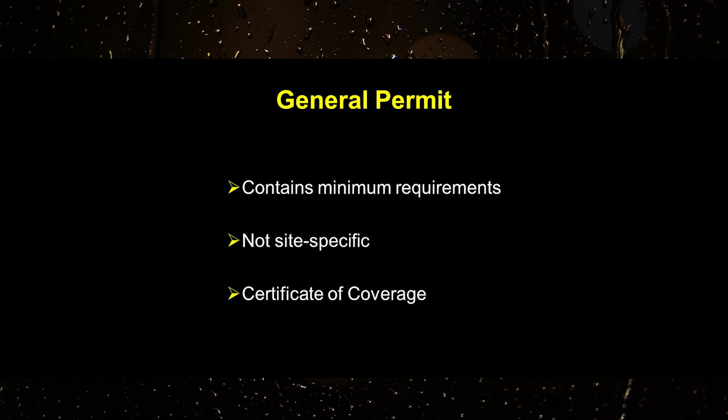A general permit contains the minimum requirements for protecting water quality and is not site-specific. A facility with this type of permit coverage would be authorized to discharge when they receive a certificate of coverage under the general permit. General permits for industrial stormwater are separated into 2 types depending on certain site conditions.

Stormwater discharges not associated with special use areas, or stormwater discharges associated with special use areas. Most facilities will have coverage under the general stormwater permit not associated with special use areas. However, facilities with the following conditions mandate a general permit with stormwater discharges associated with special use areas.

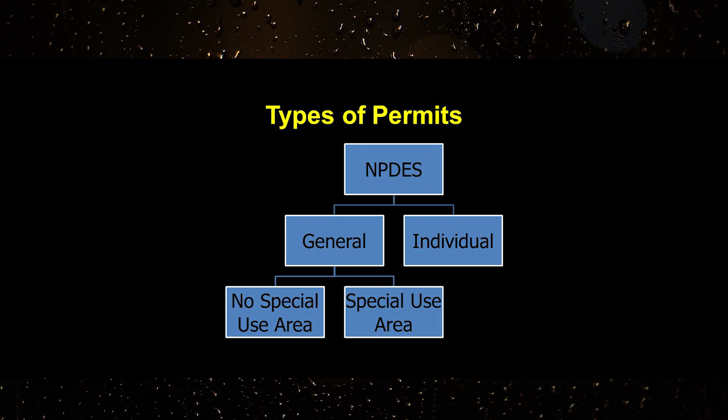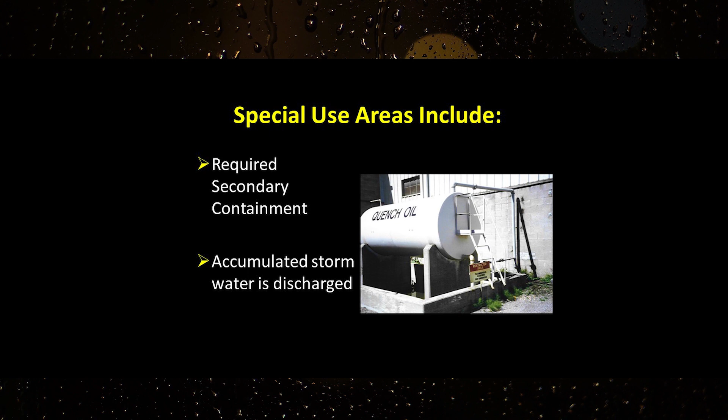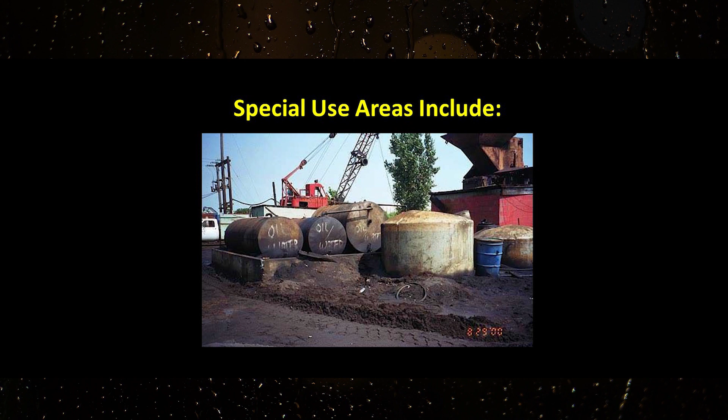Facilities with secondary containment structures mandated by state or federal regulations from which stormwater is periodically discharged to waters of the state. The facility is regulated under Part 201 of Act 451 as a site of environmental contamination or cleanup where known or potential impacts on surface waters are present.

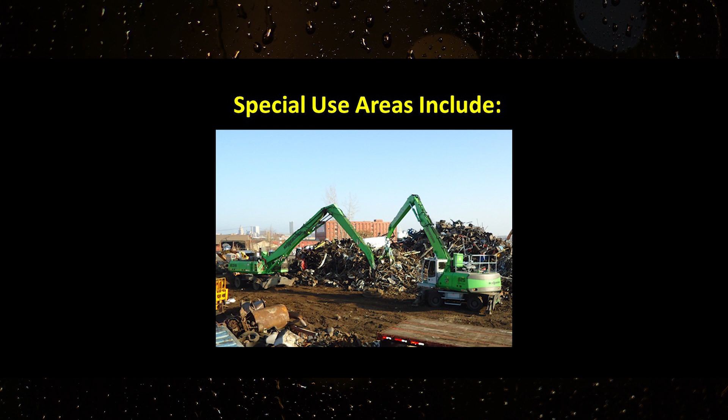The facility has other activities or areas that may contribute pollutants to the stormwater for which EGLE determines monitoring is necessary, or the industrial sector has been designated a significant contributor to pollution by EGLE.

Dependent on the special use area, the facilities will be required to submit either a short-term stormwater characterization study plan or benchmark monitoring compliance plan to assess the stormwater discharges.

Both plans must be submitted to EGLE Water Resources Division District Supervisor for approval 6 months after the COC is issued. All facilities that have authorization to discharge stormwater as of January 1 will be responsible for the annual fee of $260. Stormwater invoices are posted in MyWaters by February 1 and payment is due by March 15th.

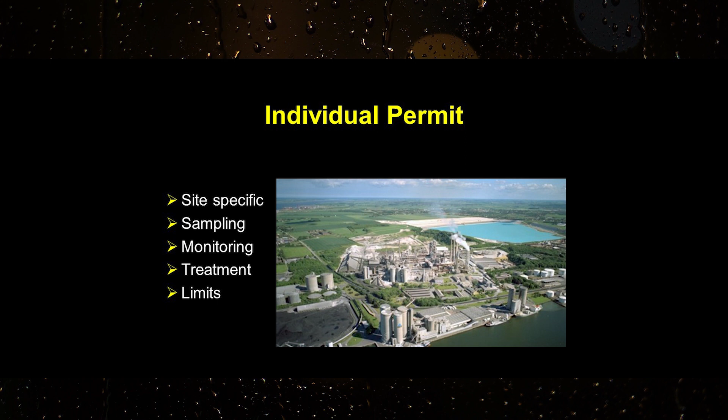If the conditions at an industrial facility cannot be properly managed by the requirements of a general permit, an individual permit written specifically for the facility may be issued. Individual permits are site-specific and contain additional requirements such as regular sampling, monitoring, end-of-pipe treatment, or effluent limits.

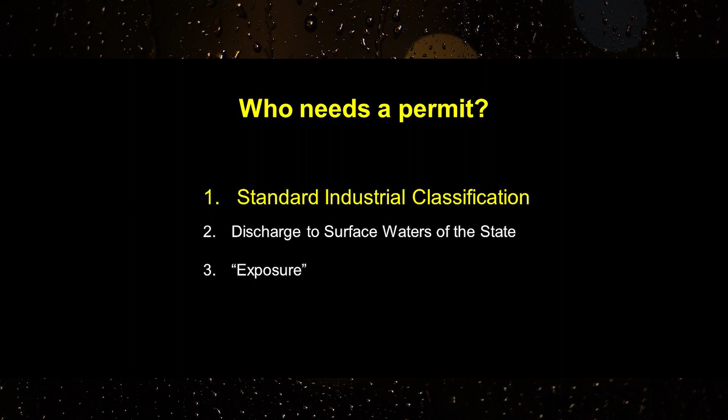There are 3 criteria to consider when determining if coverage is needed under the NPDES Industrial Stormwater Permit. First, determine if the industry is identified in the federal stormwater regulations. Most regulated industries are identified by Standard Industrial Classification, known as an SIC code, while others are included by narrative description.

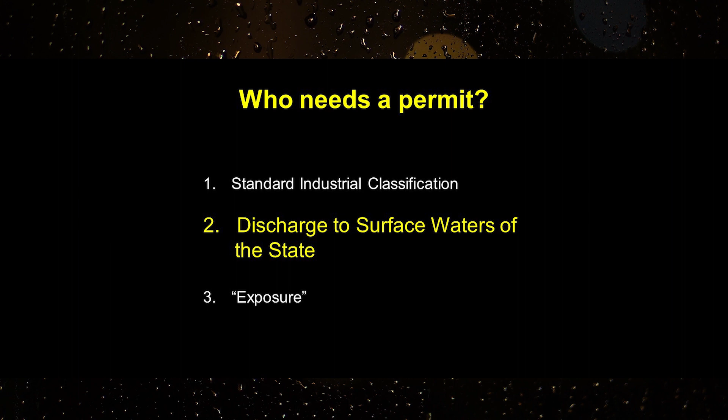Once it is confirmed that the facility is a regulated industry, the next step is determining if there is a point source discharge of stormwater to surface waters of the state. Surface waters of the state include rivers, lakes, streams, county drains, and wetlands. The surface water that receives the point source discharge is called the receiving water.

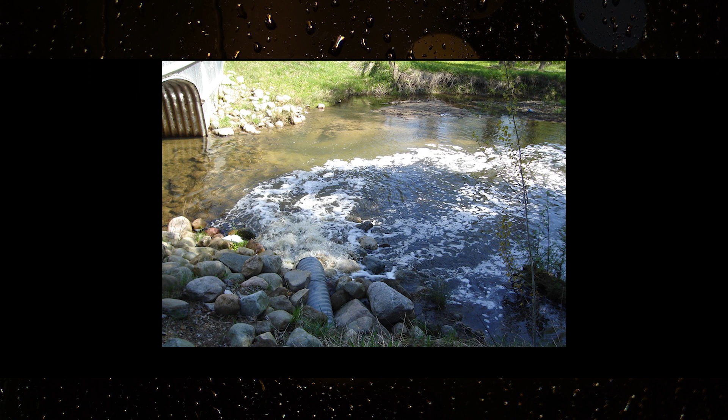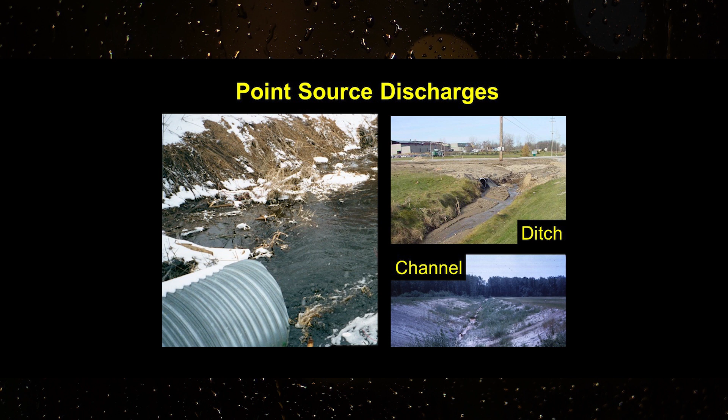A point source is any discernible, confined, and discrete conveyance that discharges stormwater into surface waters. Examples of point source discharge include, but are not limited to, pipes, ditches, channels, tunnels, conduits, or anything that conveys stormwater into surface waters.

In most cases, land graded to convey stormwater runoff across a piece of property would create a point source discharge of stormwater. At many facilities, stormwater is discharged from the facility into a municipal storm sewer system.

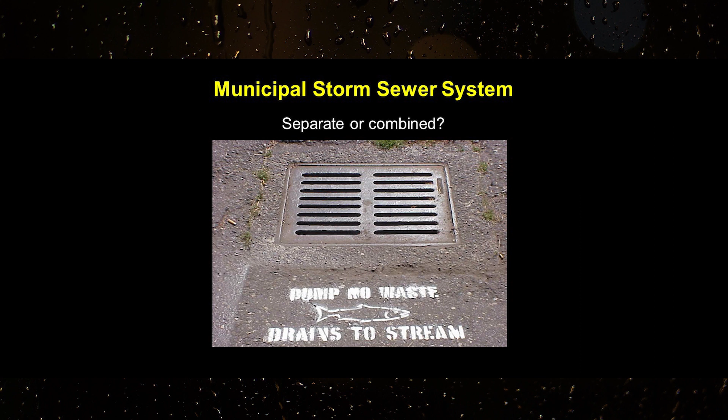It is important to understand whether the municipal sewers are separate or combined. In a separate storm sewer system, stormwater is kept separate from the sanitary sewage and discharges directly into a surface water body. The sanitary sewage, which also may contain industrial wastewater, is directed to the local wastewater treatment plant where it is treated and then discharged.

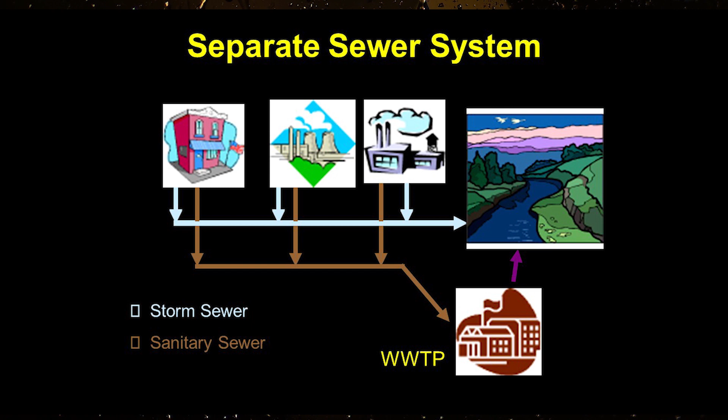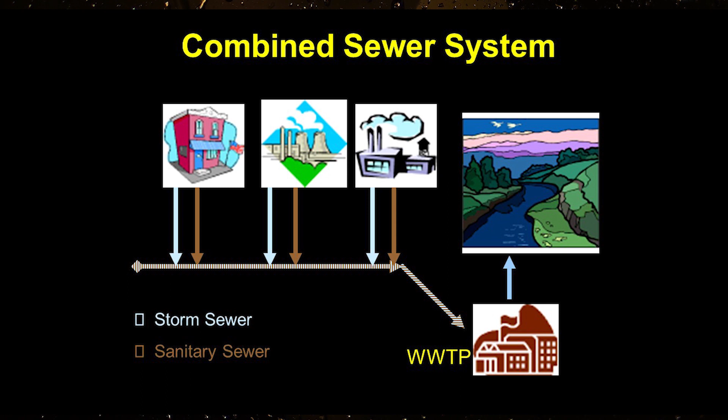In a combined sewer system, stormwater is combined with sanitary sewage and is directed to the local wastewater treatment plant. If all stormwater from the facility is discharged to a combined sewer system, stormwater permit coverage is not needed.

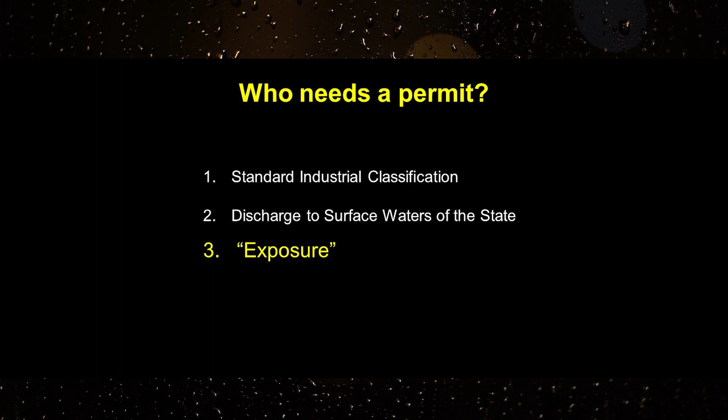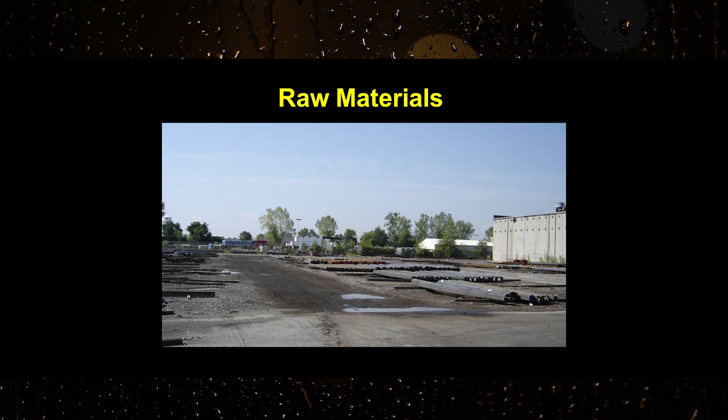The final step in the determination process is evaluating the potential for exposure of industrial materials or activities to stormwater. Industrial materials or activities include, but are not limited to, material handling, equipment and industrial machinery, raw materials, intermediate products, byproducts, waste and scrap materials, and final products.

However, final products that are designed for outdoor use are not considered exposure. However, the final products stored outdoors cannot be mobilized by stormwater.

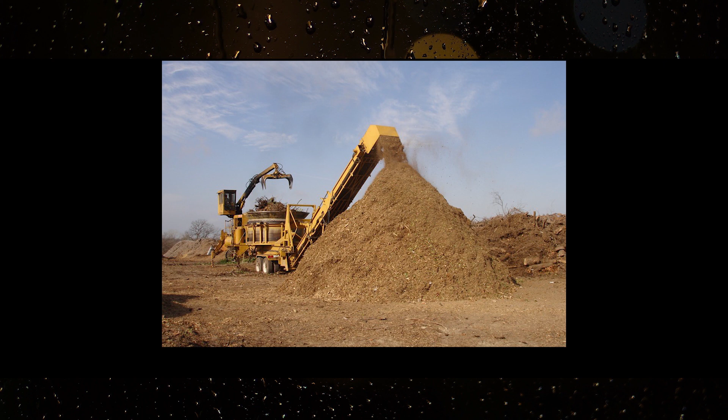Facilities without exposure may apply for an exemption from the stormwater permit requirements by submitting a no exposure certification application through MyWaters. To remain exempt from the stormwater permit requirements, the condition of no exposure must be maintained at all times, and the form submitted to EGLE every 5 years.

If there is exposure of any industrial materials or activities to stormwater, stormwater permit coverage is needed. In summary, facilities must obtain stormwater permit coverage if all of the criteria apply: it is a regulated industry that discharges stormwater to surface waters of the state with exposure of industrial materials.

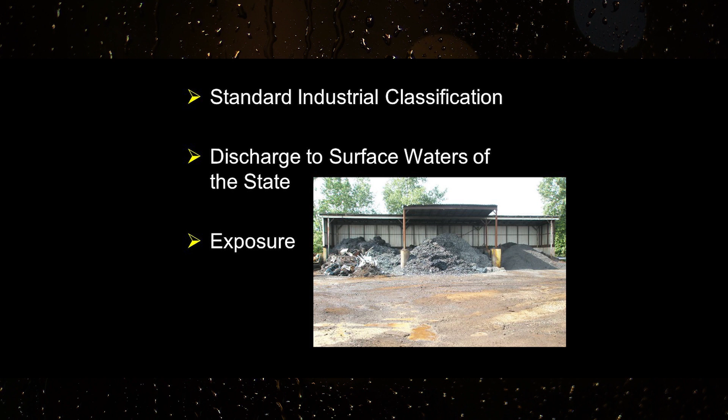In order to obtain permit coverage, the facility must be in full compliance with all permit requirements before submitting an application through the EGLE MyWaters permitting system. The facility must have an industrial certified stormwater operator listed on the application.

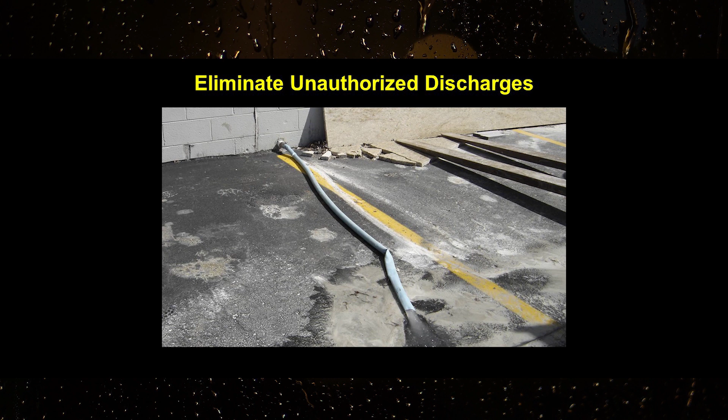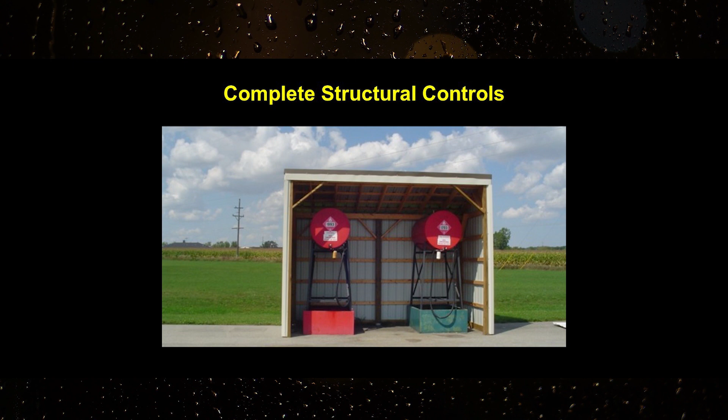In addition, by submitting the application, the applicant will be certifying that all the following requirements of the permit have been completed: that a stormwater pollution prevention plan, or SWPPP, has been developed for the facility, that there are no unauthorized discharges from the facility, that non-structural stormwater pollution prevention measures have been fully implemented, and finally, that structural controls described in the SWPPP are installed and operational.

Once these requirements are completed, you may apply for permit coverage by submitting a completed notice of intent to the Water Resources Division via MyWaters.